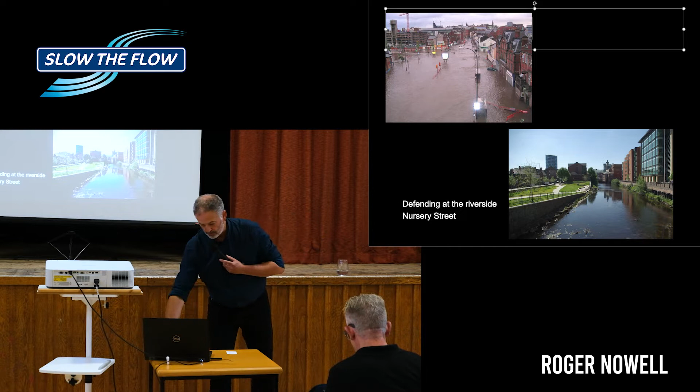We're doing defending. This is one I put in at the beginning after the flooding, which was defending and tying in with a new park. We try to be creative in how we do defence. Defence is obviously one solution, but there are other options too, such as using open spaces - we've got proposals to use maybe parks or fields on the edge of the city to hold water as well.

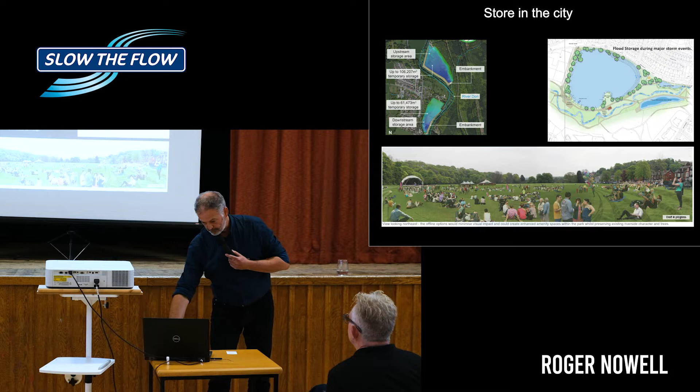Something I'm hearing very much is you can teach us a lesson or two about this subject, which is looking at the wider catchment. This is about climate resilience for Sheffield into the future and how we tackle 450 square kilometres of catchment outside the city to slow that flow, reduce the peak, and counter climate change as it erodes the standard of protection we get from defences.

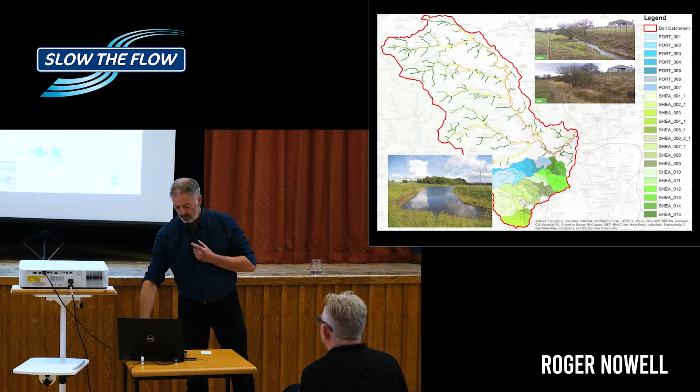So quite a lot of work to do, and Jackie's here, who I work with in the Environment Agency. We're very close workers with the EA and with other collaborative bodies and partnerships. So, like you, we're probably behind you, but we're making some good starts. But I'm not going to talk about that.

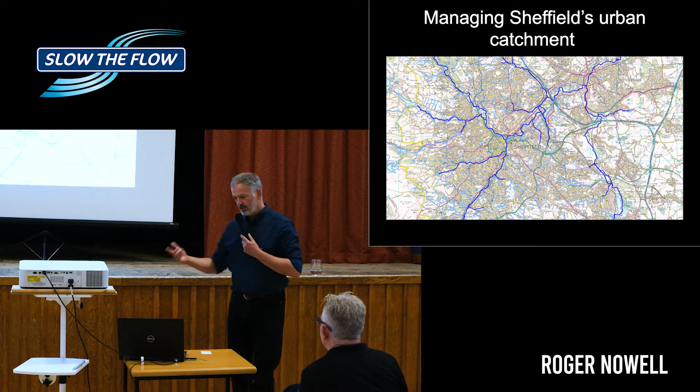I'm going to talk about urban catchments. You can see Sheffield here - the urban catchment is part of the catchment loading water into river systems. The dark blue are the main rivers, but we've got a hundred kilometres of ordinary water courses as well. So we've got a lot of work to do to slow the catchment down from the city.

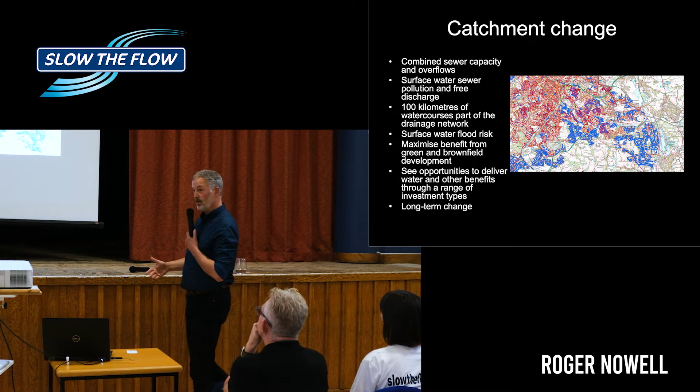I've blown this up on GIS, the blue and the red. The blue is the extensions of the city since the 60s and 70s when we separated our sewers into separate surface water and foul. The red is all combined - that's combining foul and surface water. They both have their issues. The combined system has issues with combined sewer overflows, maybe sewer flooding with capacity, climate change, urban sealing, urban creep as we call it.

But the blue is also thrown into the rivers straight away. It's only in the last 20 years we've actually been slowing water down from new development. Before that, it was just chucking water into rivers with pollutants off surfaces like hydrocarbons, heavy metals, rubber from tyres - all those things going into our water courses. So there's a lot of things to deal with.

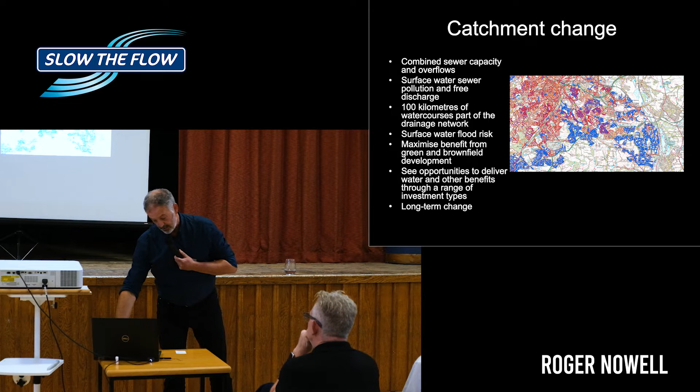The water courses now are playing more and more of a role in the city, because before they were isolated from the catchment. Now we're directing new developers to rebuild the city connected to those water courses, trying to get maximum benefit from brownfield redevelopment and greenfield sites to slow that flow down. But it's not just about development - it's about other infrastructure investment around the city, other ways we can deal with water and get multiple benefits. I say long-term change because, like the rural catchment, it's multi-decades here.

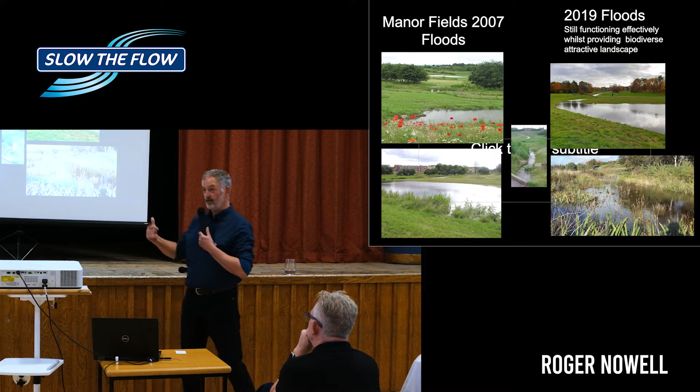Just a quick one, a few slides of SuDS - we've been doing this for 20 years now. This is Manor Fields, this is how I got into this subject. This is managing a Bellway Homes development, 300 houses, and it's still operating beautifully as of 2019, holding all those cubic metres of water, slowing it down, adding biodiversity, adding a dynamic interest in the park - what's not to like with these features.

We've got many of these now across the city. This one's been running a couple of years, managing 8 hectares of housing from different developments. We built it and then get money back from the developers. The end result is a controlled flow of clean water that returns to the river from all those hectares of development, because it's going through a series of wetlands that can store thousands of cubic metres of water.

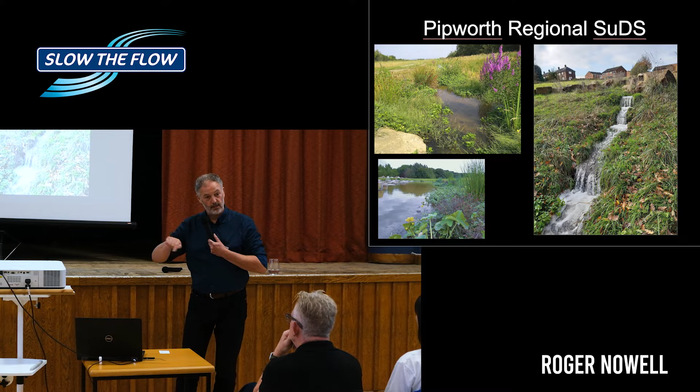So we actually charge the residents a small fee for this so we can look after it into the future. That's how we're looking after these features.

We're trying to do source control as well. That's integrating what Amanda said, where water, rain falls, you manage it as close to where it falls. Source control. In the development itself, can we do stuff within development?

So, permeable pavement, it took me 2.5 years to get highways persuaded to have this included in our highway adoption, and convince them that it's not going to cause people to fall over, or worms come out of the ground, or block. You know, these things work. Without maintenance, they work brilliantly. With maintenance, it's absolutely fantastic.

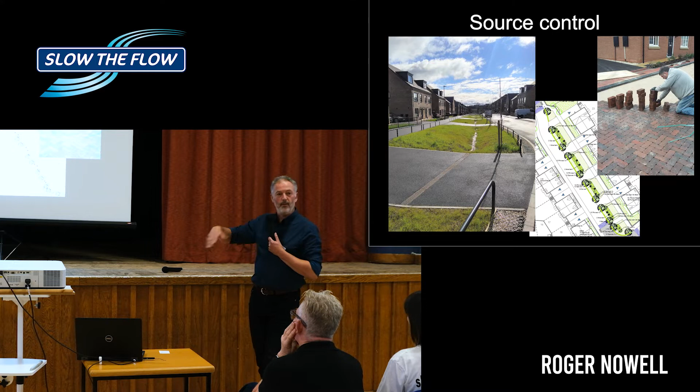And in any integration of green within a development, can we manage to get water on the surface through that development? But I'm really here to talk about the retrofit side, the city centre sort of stuff.

Grey to Green, as it was the first project, I'm going to talk about that now. That'll be the main focus.

This is the city centre of Sheffield. We've got these kind of routes through the city. The orange one is the gold route. It's thematic, trying to get some readability to the city, really. So that one's running from the station. We've got the steel route running north-south. And the purple bit is Grey to Green route, if you like. It's the green bit, and that's the theme for that particular area.

Now, at the top of the picture, you probably can't quite see it, but there's a sort of yellow line, because the purple route was where all the traffic around the north of Sheffield went to the M1. That was the main route, multi-lanes, tons of traffic. We pushed the traffic to the north and, in effect, generated an extension to the city centre and the potential for redevelopment and expanding, quality environment.

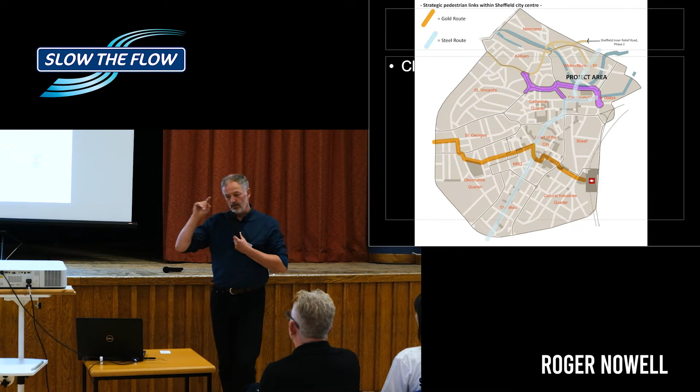So the idea of Grey to Green was to address the issues of that area. And you can see, obviously, highway, really redundant highway, because it was no longer used, but it was a kind of barrier to movement with railings and lots of traffic lights, really unused, a lot of hard standing. Flooding is a legacy in that area as well, from the river.

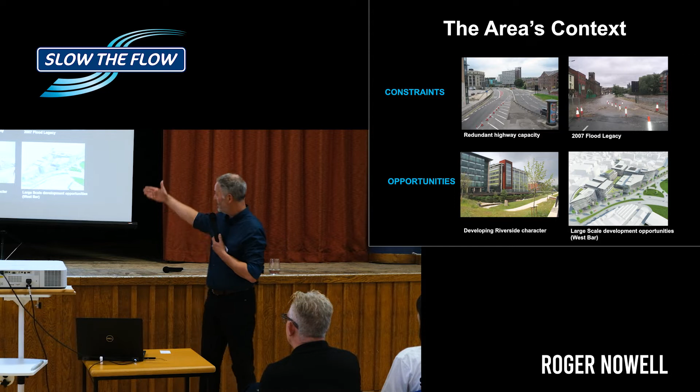There are lots of opportunities of new developments, so trying to create a setting for that, but also for people living in the city as well, so more people living, so the importance of creating green space. That's a new part of the river there. So lots of opportunities associated with Grey to Green.

There's Grey to Green 1 in 2014. Just really an uninviting area with quite a high-profile demand. That's the law courts. We've got some serious law firms. Irwin Mitchell, one of the big law firms of the country, just around the corner here. And a massive development site to the rear.

So the idea of trying to create a better environment for people to be in, and not a barrier. And these are the kind of key things of creating a setting for investment, which was really what Grey to Green was about. It was an economic thing. It was about creating jobs, creating floor space, creating an attractive environment to bring investment in. But all those other things were what we were also trying to do at the same time.

So sustainable drainage was always there. We've been pushing SuDS through the city historically, let's get it into this redevelopment. Obviously sustainable transport being part of the mix, cycling, pedestrian, making space for people, getting the vehicles reduced down, reduced area, reduced speeds. And then these other things about getting a different sort of vegetation into the city.

This was working with the university, so you'll see some of the photos of that, and I'll explain what that's about. So these ideas of reclaiming highway, lots and lots of highway, lots of impermeable surfaces. Can we make actual new spaces out of the redevelopment of this area of the city?

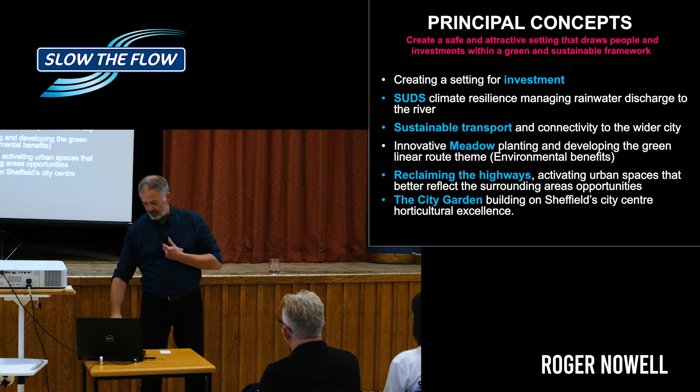And the city garden is really emphasising the issue of city centres now. They're changing, aren't they? Retail is becoming less dominant. We need to have other things that people are drawn into cities for. And we want plants to be that draw. We want the colour and the seasonality and biodiversity to be an important part of that mix.

So that's Grey to Green, that purple long sausage you saw on the drawing before. That's the two lumps that have been delivered, Grey to Green 1 on the left, Grey to Green 2 on the right. So it's over 1 kilometre long. We've got spurs that are being done at the moment; in fact, some have been completed off that as well. So it's a complete transformation from a large amount of tarmac to a very green environment.

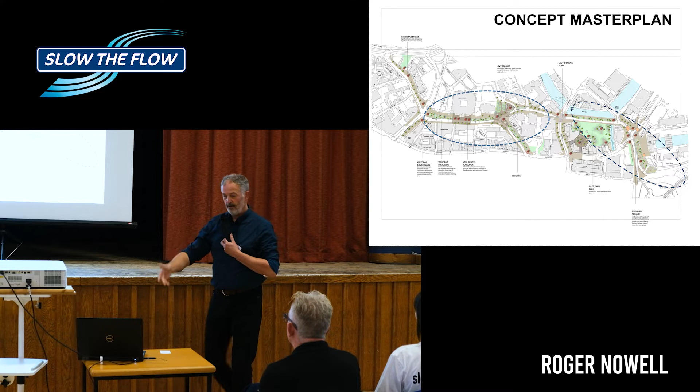Just to run through the thing, you've got to first of all lay out what you need from a transport point of view. That's the key thing. What are the bus routes? Reconfiguring the buses, the city centre is part of this. So what are the bus routes? Where do we need cycle connectivity? Where do we need pedestrian routes? I suppose you have to get these elements in and see what you can work with and win out of the land that you have to generate green from.

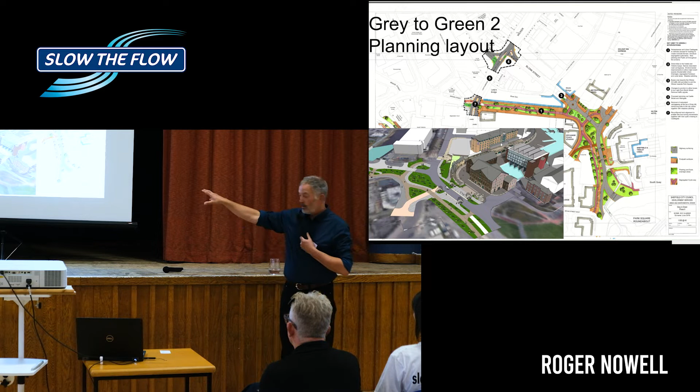So that schematic there is showing what we've actually acquired out of that planning process. It's not just about greenery, so many other things. This is really part of the argument for doing Grey to Green. It was more than just putting green in. These are all the aspects that you can get from that sort of thing.

So that's the main drag in front of the law courts. Obviously the SuDS element is about capturing water, we'll talk about that more. Combined sewer flows and treatment reduction. This has all been taken out of combined sewer and going to the River Don, so that's extraction out of the system. Carbon capture maybe, but we're creating great environments for tree growth, big soil environments with irrigation from natural rain, so we're getting great growth on trees.

That's an aspect of building biomass within the urban environment. And obviously, with the drought we've got at the moment, drought tolerance is really important. These are getting irrigated, albeit we didn't get much rain for a long time, but when it does rain, they get rain. It's about designing vegetation that is drought tolerant, but also gets irrigated by that rainfall, so it soaks up these rainfall events that we've had.

But there's other things as well. I'm sure you'll know there's all this deep vegetation around Grey to Green. There's obviously a big filter to low-level pollution from vehicles and creating fantastic roots at the same time. And obviously the tree canopies as well.

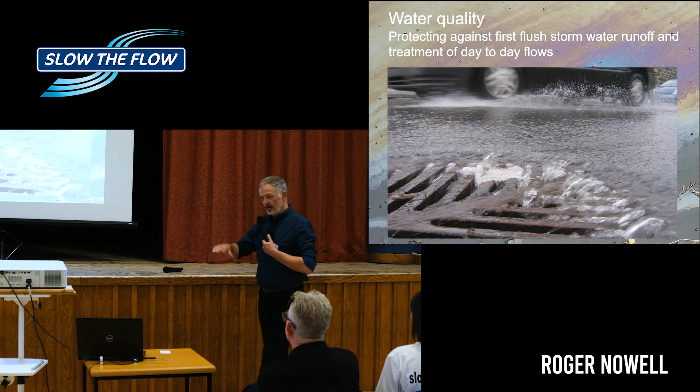And then water quality. We're putting water into the river here off roads, so we need to look at how we can integrate water quality into the greenery that we have. Because there's hydrocarbons and so on, we don't want those finding their way into the river. But we're winning space here. There's so much tarmac that we've been able to create new places.

I was there the other day, and there must have been 40 people gathered in this whole seating area, from being tarmac to something completely different and wonderful, really. And obviously coming with that is the health and well-being aspect. People are taking these routes to work now as a choice because they're shady and because they're biodiverse, colourful and so on, interesting to watch throughout the year.

And even this is on Grey to Green 2. We've completely closed this road to buses. This is now totally pedestrian and cycle, and now we're using that for a flower market every month, and that works really well. It's a fantastic addition to the cultural calendar for Sheffield.

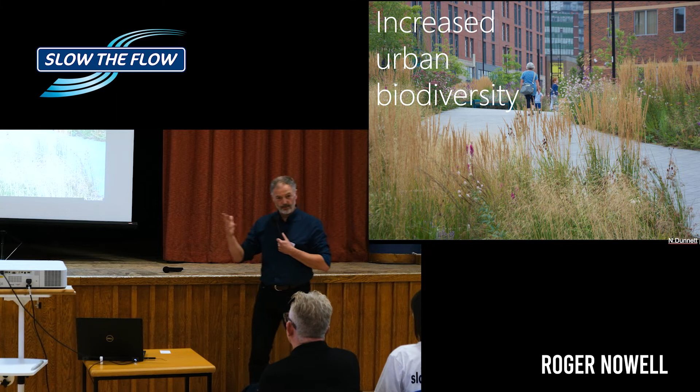And obviously, biodiversity—we're going from the tarmac, aren't we, too. Basically, the other day, it was full of grasshoppers in the sun, fantastic butterflies, bees. It's just a no-brainer, we're generating quite a lot of biodiversity from these things.

So the SuDS aspect of it, really, this is a retrofit. It's not driven by having a major flood problem there, it's taking an opportunity to put SuDS in as part of infrastructure. And the learning that comes with that has been massive, so I think that's a thing to say about retrofit—it's a huge learning opportunity.

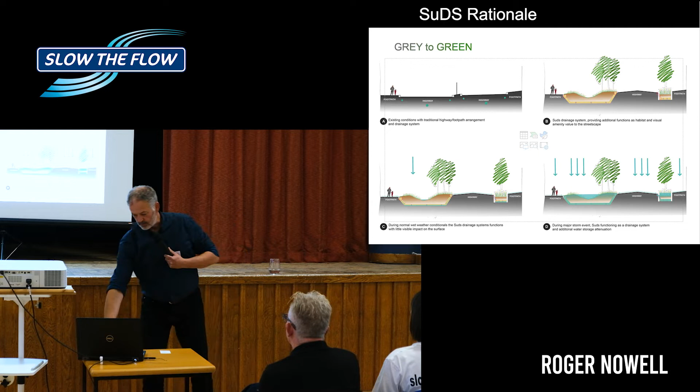So taking that opportunity, making landscapes manage water, getting benefit from the water in the landscape—it's future-proofing, it's returning water to its natural catchment back into the river system, all sorts of benefits. That's the rationale behind it.

And we employed a SuDS designer who I've worked with for 20 years, Bray Associates, and the SuDS thinking about how you design SuDS—these are some of the classic criteria we're trying to follow. Amanda mentioned some of these, mimicking nature. We're trying to keep water near the surface in the vegetation, allowed to soak into the ground. One key thing is over the surface, it just runs off the surface of the road, and that was a challenge with highways—no curb—but the water just falls off the road into the SuDS and soaks in, and is on the surface. It's not being condemned to a pipe network by a gully, which is basically what conventional drainage is.

So what that does is capture treatment of pollutants, the ones I mentioned, because they're now linearly spread along the whole of this road, open to aeration, open to oxidation, bioremediation, photolysis from the light, and all sorts of things. All these things are broken down.

And we're getting other things here. Now, interception losses is a SuDS principle, and that's really about the fact that most rainfall events, 90+ percent, are really very small events, and most of them don't even find their way to a watercourse—they're lost in the landscape. But when you urbanize a catchment, most rainfall events flashily go to a watercourse. What we're trying to avoid with SuDS is to get that interception losses, so all those small events probably never leave this vegetation, and that's what nature should be about.

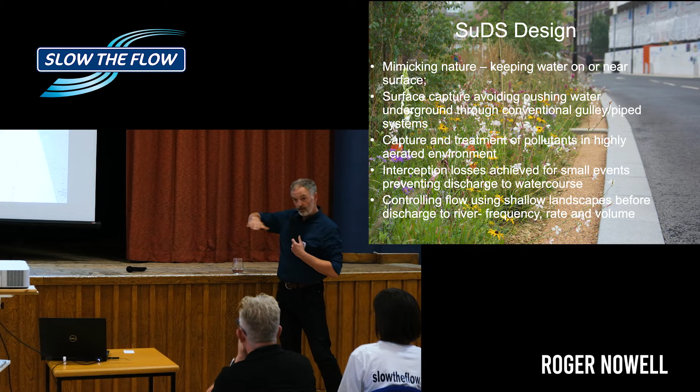We're also trying to utilise this landscape to control the flow, using shallow landscapes to hold that water before it's released to the river.

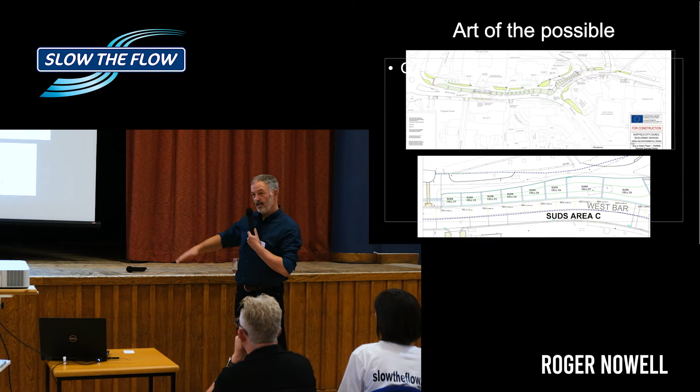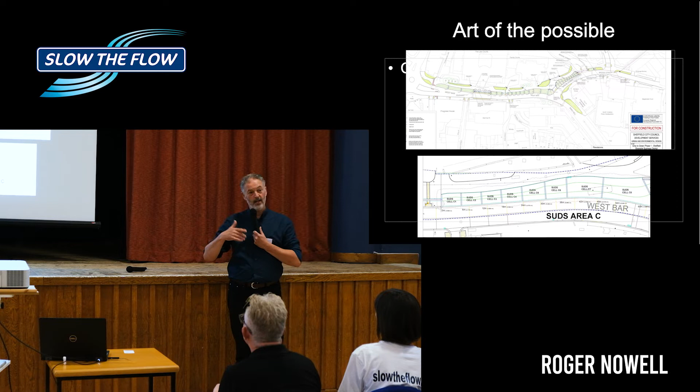Because Sheffield slopes, like a lot of places, you're trying to hold the water down the landscape in a series of terraces. You're holding the flow, and it's passing down the network. So, the art of the possible is saying, don't set yourself a target necessarily from SuDS in an urban context like this. It's what you can achieve with the area you can win, with the topography that you've got. It's what you can actually get out of the scheme at the end. And you don't necessarily know until right at the end of the design process.

So, controlling the quantities, water goes over the edge like that. There's 27 in Grey to Green 1, 27 lumps of water stored down the system, and the flows modelled down that system. All the flow coming off the road and the footpaths are passed into each cell, and then each cell passes forward down the system.

I'm not going to go into the details of that, but there are check dams. You can see this concrete here. They're forming it, it's quite an urban nature to this, so it's kind of quite strong in its urban design quality, so that is holding the flow in each of those sort of areas.

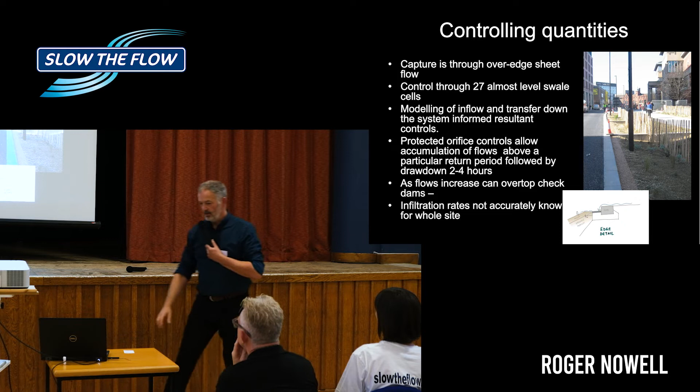And there you are, that's the steepest section. This is really where these features become very close to each other. And then slackening out, this is where they're broader, they're slacker, and you can have them further apart. So each one of those is holding the water back.

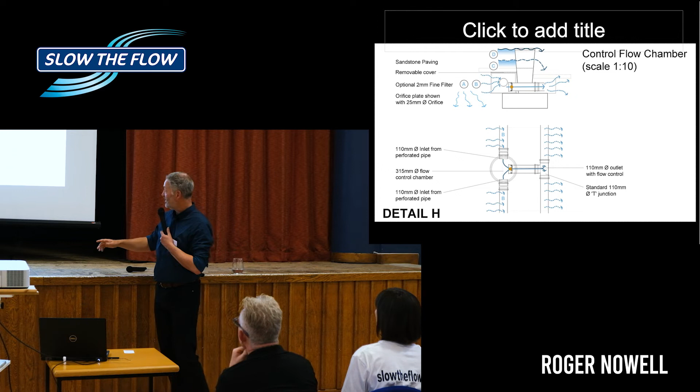I'll just describe how that works. The top picture is a wall, and water can actually run through the wall underground in a sort of pickup pipe, and it passes the water through the wall. But if that can't take the flow, it actually builds up behind the wall, and it overtops through what we call a slot weir. But it can actually overtop right over the top of the whole wall. Now, I've never seen that, but I have seen it go over the slot weir in extreme events. So, that's basically how it works.

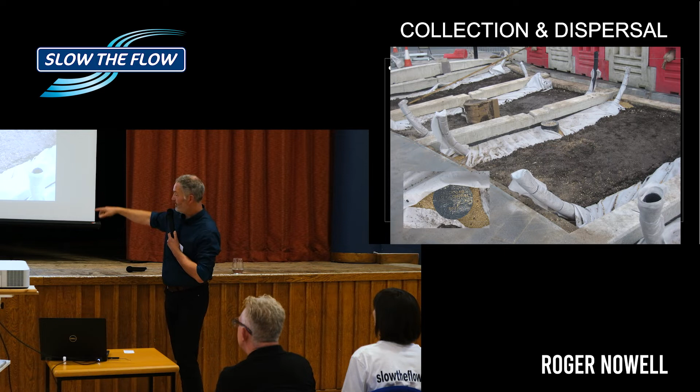You can see them on the picture. These are the pickup drains and the soil going in, and the control chambers here. There's 27 of those. It sounds a lot, but they're very cheap to build, and they allow you to use the landscape to control flow. Rather than having it all controlled at one point over here, you control it in lots of places to a known amount. And that's the cascade in the model, if you like, of the storage running through this site.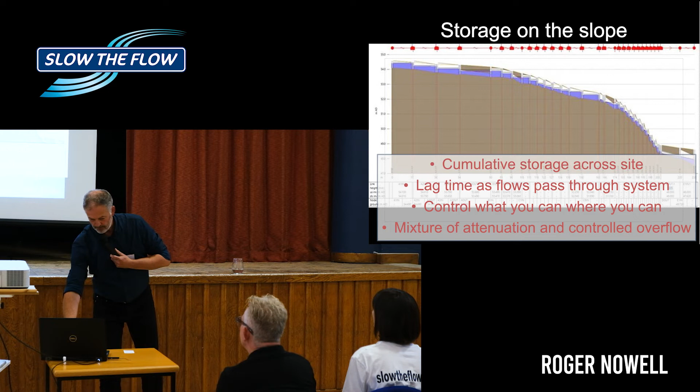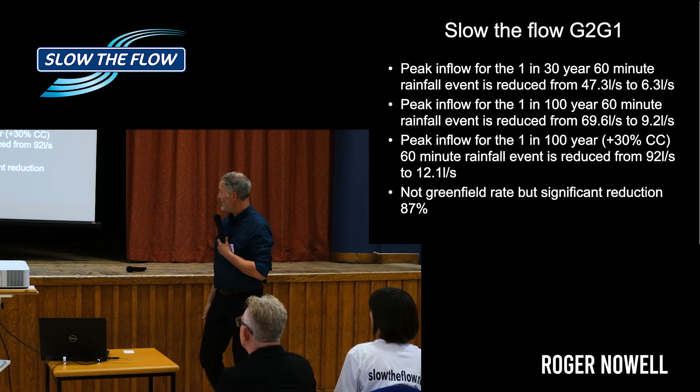Just to kind of summarize, I can go through that, but the peak flow for the 100-year event, you'll have heard of a 100-year event, because I know you're all slow-to-flow enthusiasts, and I'm not going to try and explain that, but that is obviously, with the climate change allowance, you're getting a massive reduction in flow from all that flow belting off all the surfaces, that landscape and holding in these massive extreme events quite a lot of flow. And that's a similar graph to what Amanda had, inflow with the blue, and then the two curves here are with the impact of the SuDS effectively.

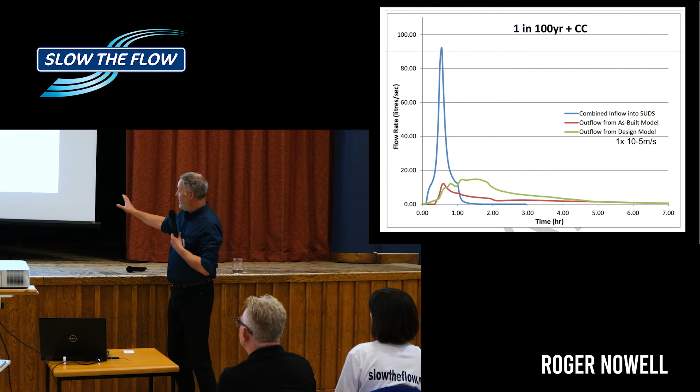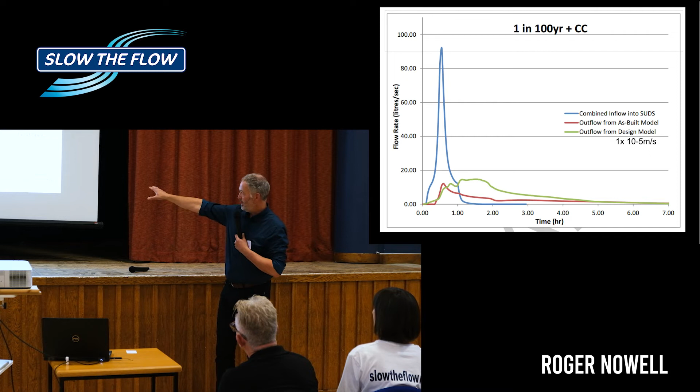And the outflow as built was because we were able to not line these SuDS eventually in the design, and we could get some losses into the ground, which meant the volume in the curves actually being reduced down by losses through infiltration.

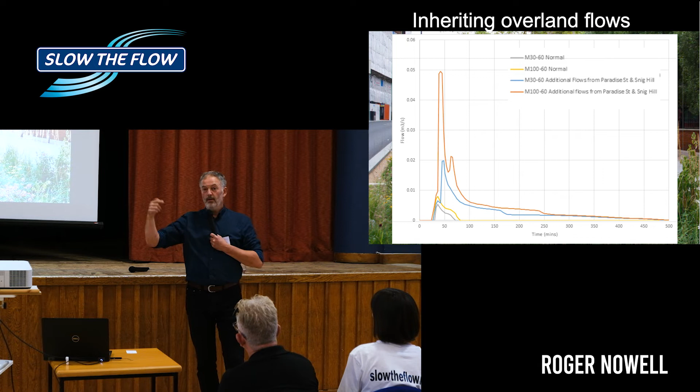These things manage the surfaces immediate to them, but another important aspect is about exceedance generally in cities. With intense rainfall, water's going to be on the surface from all over the place. So we modelled flow coming from other roads at the side of Grey to Green, and if they exceed, because they're on slopes, what will happen? We modelled those, and it was showing quite a high benefit in controlling all that flow from surrounding areas. That's another curve showing how that works.

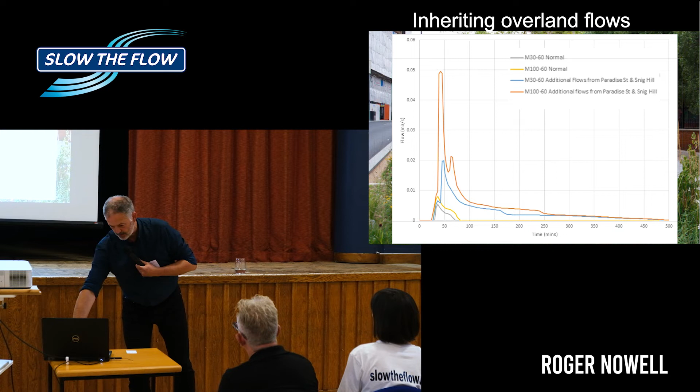You may have heard of the Cloudburst project in Copenhagen, where they've had massive overland flow of surface water going through their city. This is in effect trying to mimic that. It's day-to-day management of the exact areas of contribution, but also inheriting flow paths through the city.

I'm not going to go into that, but that's Grey to Green 2, and 440 cubic metres of water stored within the cells and outflow into the river. The sort of areas, 8,000 square metres of land going into that scheme.

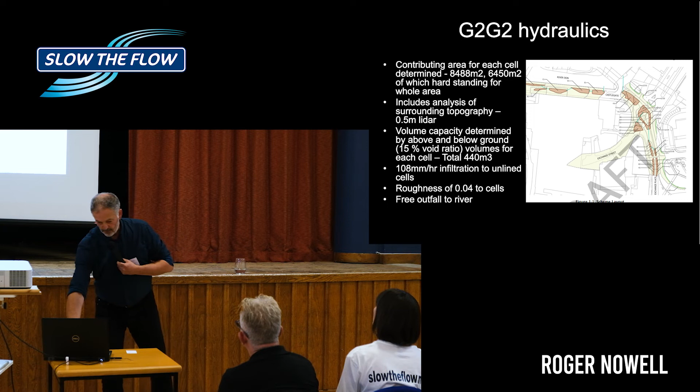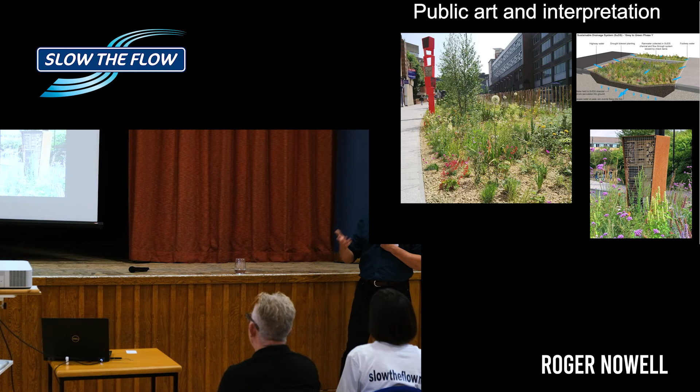Just a few pointers that we found really good, including public art in our SuDS - it's really important, informative, celebratory. This is a mixture of celebration of that area of Sheffield historically, but also bug hotels - why not get something sculptural in that adds to the quality of the environment, it sells the story.

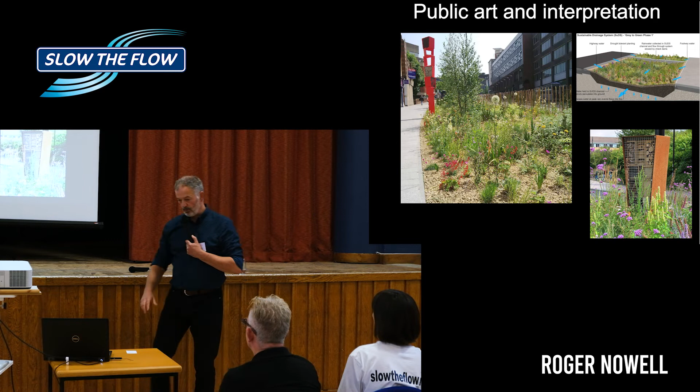We've got little placards throughout the SuDS with messages about the quantities of water, or the level of carbon and biodiversity. Bits of the interpretation board as well to explain how it works.

Just to talk about management, everybody's obsessed with the management. There's been an overall reduction in management costs for this area, because before it was traffic lights, railings, bollards, tarmac. Rip all that out, put planting in, it's actually been a reduction in the cost to look after this area of the city. So, not that that's always going to be the case, but it's to indicate that sometimes you have to think maybe we could get a benefit here from the change we're making.

We have a 3-year experiment, and the outcome really is spot weeding - there's very little of that. Buddleia is probably the biggest pain, and a bit of litter picking at the edges, then one cut each year in about February, and the whole of the landscape is cut to the ground, bar the trees and shrubs, with a deep litter pick undertaken at the same time.

So that's the sort of thing. These are quite big beds, you can imagine you can't litter pick into the middle of them. But that is the style of the cutting and the style of the planting. This is kind of perennial, dry, perennial planting in a very free-draining soil. We'll talk about that shortly.

People do ask, why have you done this in Sheffield? It's probably a combination of the team - people who worked in Sheffield for years, either as highway engineers or landscape architects, and a number of people like Nigel doing it at the university, coming with planting ideas. We had a good SuDS designer, so they were light touch, and I really recommend that. If you can get a SuDS designer to come in and support the learning of your highway engineer and landscape architect, you can have a team that's skilled for life in carrying on and doing this. So that was really important.

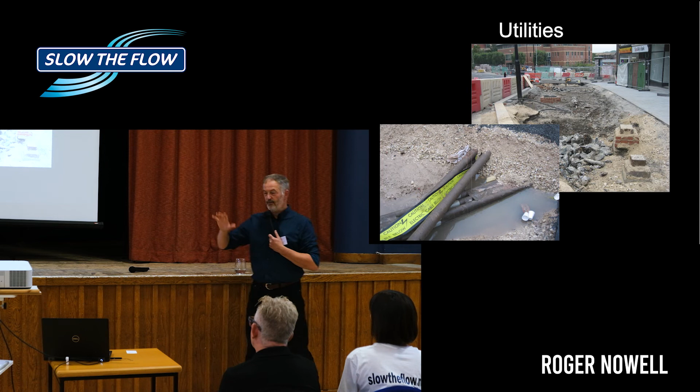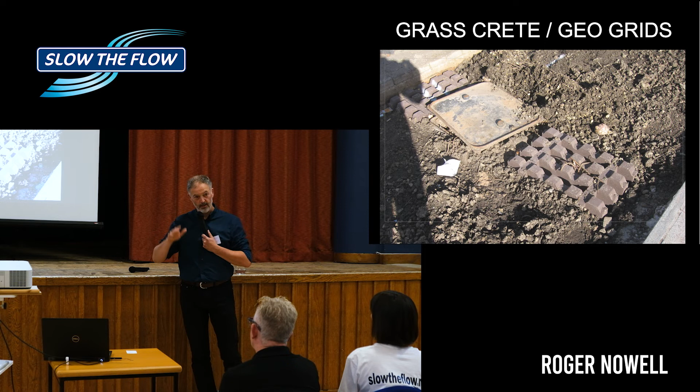Utilities, again, people go, utilities, we can't do anything. Utilities can be accommodated in many situations within SuDS schemes. It's when they're at a level where they will be floating in midair through your SuDS that maybe you need to think about it. But we've got all sorts of utilities running through our SuDS scheme, and some of them we've actually earmarked, highlighted in this paving system through the SuDS. It gets lost in the vegetation, but it's protecting the utilities and keeps a location clear as well.

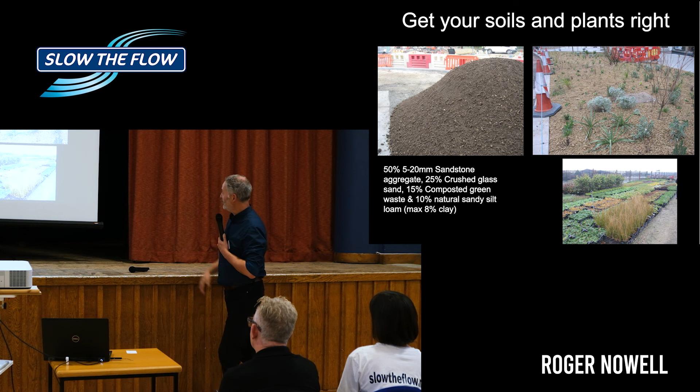Soil's really important. We've got very eco soil here, completely compost, green waste, sandstone aggregate waste, crushed glass, and sandy silt from sugar beet washings. It creates this soil with very free draining, fertile, but with a bit of guts about it. It's not a complete powdery mess. It does have something about it, and it's just proven to be fantastic because it's a foundation soil really to your planting. It's in conditions like this with droughts that the soil really shows why it was good to put the effort into choosing that soil and the right planting that goes with it.

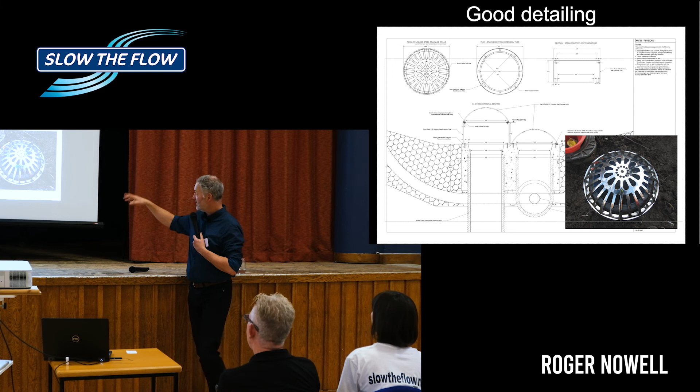Just a few other things, detailing. We've tried to come up with some new ideas. Celebrating Sheffield steel, so stainless steel overflows, so water goes into a bed, it infiltrates into the ground, it's picked up, but then in extreme events it can't go in the ground, it's filling up the landscape, and then it has to go somewhere. So we have these overflows that go into the system below and then off to the river.

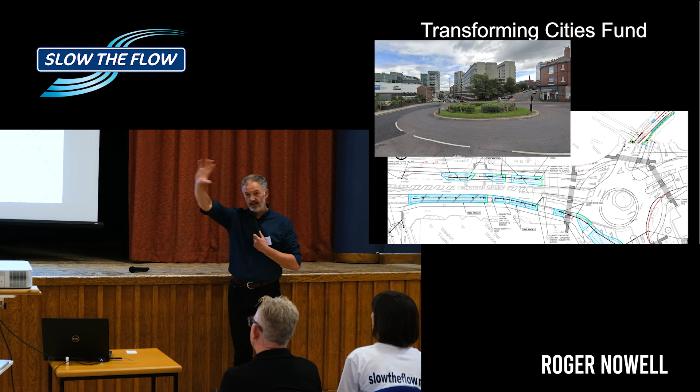Just to say, Grey to Green is, we've done 2 big schemes now. As I say, largely economically focused, but now we're on to transport schemes and changing the fabric of the city's roads. So we're now looking at all the city's roads around the city centre where we can introduce SuDS in whatever way we can. This runs to Grey to Green, so it'll be linking up, spreading these fingers of green through the city, downgrading roads and generating more. And the same with the Future High Streets Fund, SuDS all the way down our main old shopping street, Fargate, controlling the flow, in this case to the sewer, we can't get it to the river, it's just not possible.

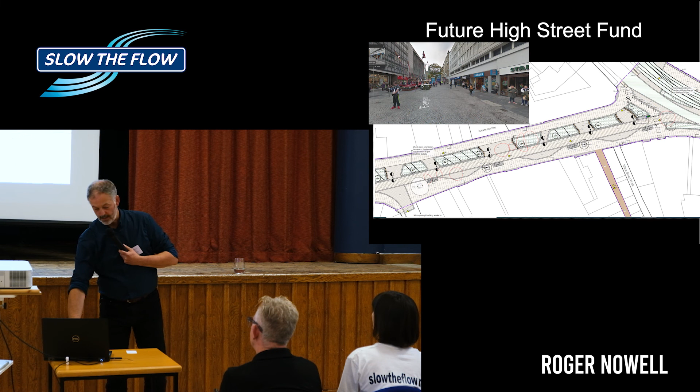And just to say, the influence of doing retrofit, it's becoming normalised. As I say, if you get the skills and people locally, then you start to kind of see this, we should be trying it on everything. Why not? So normalising that. And the good thing is, by doing it in retrofit, it starts to influence new development. Manley was saying about Schedule 3. Hopefully, fingers crossed, we will get more pressure on developers to take up SuDS. If we're doing it ourselves already and testing it and adopting it and seeing how it works, then that adds huge value to pushing developers to include it.

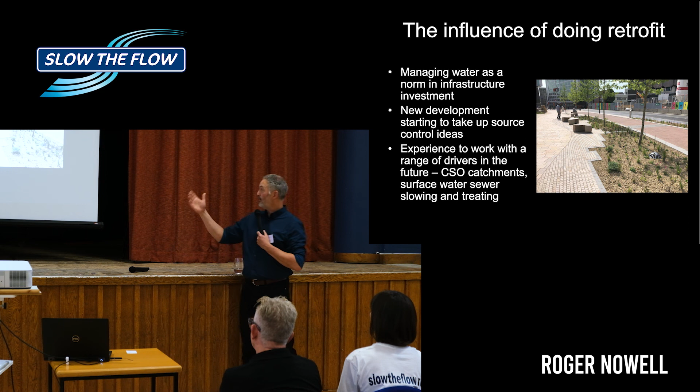So we're getting developers now to provide retention, as in these sorts of planting for highway in their housing development. So we are getting that. And obviously it gives us experience to work with other drivers. As I say, a lot of these areas haven't got a water problem, but it brings experience. So when we have areas with water problems, like flooding, surface water flood risk, or sewer flooding, or whatever, then we can use the skills and the experience to actually bring to that.

So delivering more retrofit, it's about aligning investment opportunities between different partners. But I think accepting all those benefits that SuDS can bring, biodiversity, carbon, cooling, air quality, blah, blah, blah, transport as part of it, actually a lot of retrofit SuDS will be a mixture of funding at the end of the day. So we'll probably have to accept that. So better valuation of SuDS, I think that's something we could do more of in Sheffield. What are they really providing now that we've built these things, in all these different aspects that I've just mentioned? But I think a challenge to the people who really have got the water problems is to try and give time to explore all these ideas of integration of water into our cities.